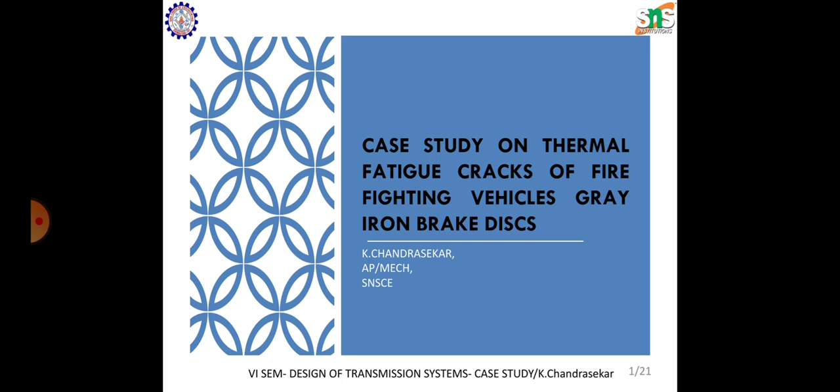Before entering into the case study, let me give an introduction. The braking system represents one of the most fundamental safety critical components in modern passenger cars. We all know that braking is important, and braking performance of a vehicle can significantly be affected by the temperature rise in the brake components.

If the temperature rises, the efficiency of the braking gets reduced. The frictional heat generated at the interface of the disc and the pads can cause a high temperature. That heat is produced by the friction between the disc and pad.

The temperature may exceed the critical value for a given material, which could bring undesirable effects such as brake fade, local scoring, thermoelastic instability, premature wear, brake fluid vaporization, bearing failure, thermal cracks and thermally excited vibration. These kinds of effects may occur when the temperature of a given material exceeds its critical value.

If the brake is made from grey cast iron, then that grey cast iron has certain properties. If the temperature exceeds the critical value for that grey cast iron, then effects like brake fade, local scoring, and thermoelastic instability may occur.

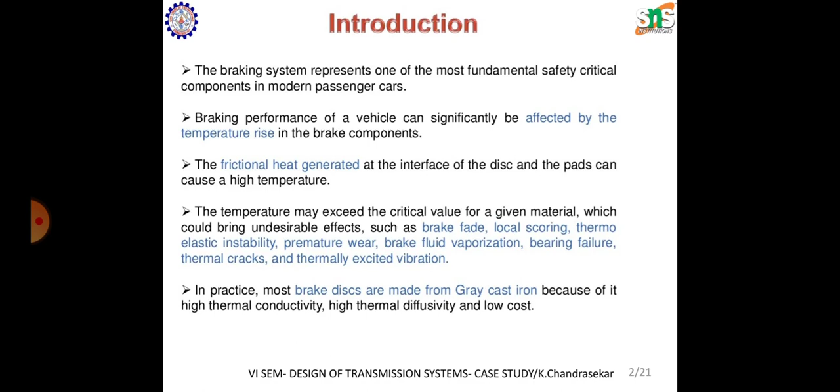The brake disc got failed and that is taken for the study, so we go for the analysis. What are the failure analysis?

Causes for thermal fatigue failure: from the company I got that the failure is due to thermal fatigue. The thermal fatigue may occur due to, first, high speed with heavy braking load; then elevated temperature gradient; then continued environmental exposure. These three are the major reasons for thermal fatigue.

In this study, the failure analysis of the brake disc used in a firefighting vehicle was carried out. Detailed studies including visual examination, optical microscopy, scanning electron microscopy, X-ray energy dispersive spectroscopy, chemical analysis, metallography and hardness measurements were included to find the final root cause of the failure.

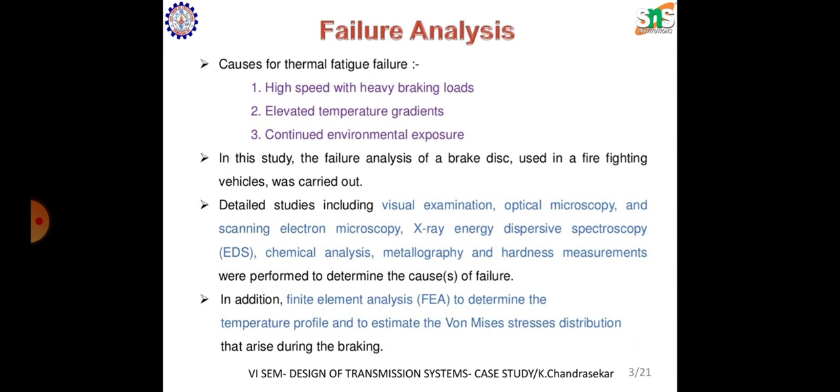In addition, finite element analysis to determine the temperature profile and to estimate von Mises stress distribution that arise during the braking was also done to find the temperature profile.

The brake disc characteristic is very important, that is, to find what are the critical values. The brake disc in this case was designed to withstand local scoring, thermoelastic instability, premature wear, brake fluid vaporization, bearing failure, and thermal cracks. So this brake disc did not fail due to these reasons. There may be one particular reason that we need to find.

The table shows the basic characteristics of the brake disc. Inner disc diameter is 66 mm, outer disc diameter is 262 mm, disc thickness is 23 mm, disc height is 51 mm, vehicle mass is 1385 kg, deceleration is 8 meter per second square, initial speed is 28 km per hour, and effective rotor radius is 100.5 mm.

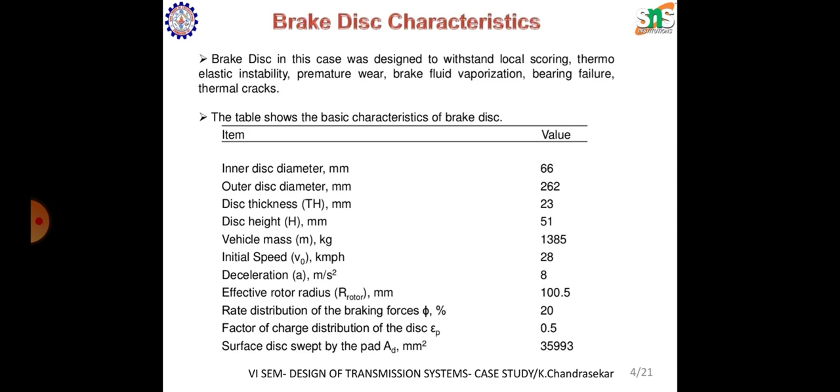The rate distribution of braking forces is 20%. The factor of charge distribution of the disc is 0.5. The surface of the disc swept by the pad is 35,993 mm square. These are the characteristics of that particular vehicle disc brake.

This figure shows the assembly or dismantled view of the disc brake. The shaft is attached with the bearing flange, then the flange is coupled to the brake bracket, and the brake bracket is attached with the disc pad and also the caliper.

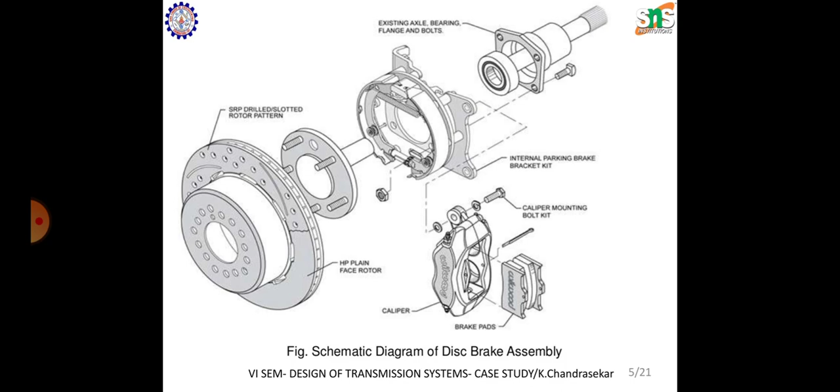So it is shown in the figure. So the disc, in the figure the leftmost one is the slotted disc. That slotted disc is the general assembly, but in most vehicles they don't use the slotted disc. Recently slotted discs are being used, but in the initial stage there was no slotted disc. So in this firefighting vehicle also they don't use a slotted disc.

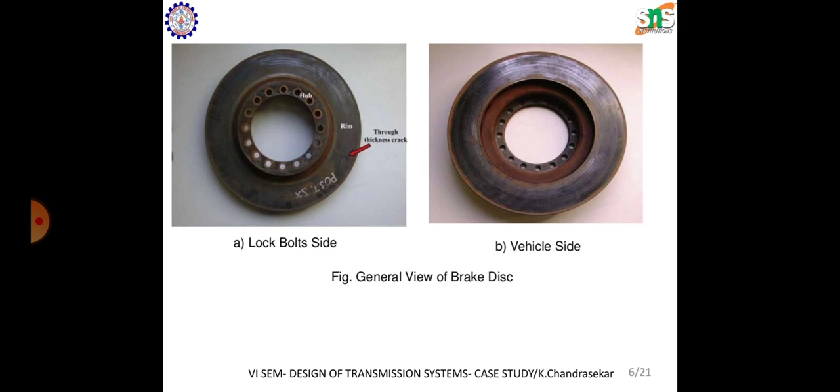So the disc used in that vehicle is shown here. Figure A shows the lock bolts side, and figure B shows the vehicle side. So one side is like a male part and the other side is like a female part. The arrow mark shows a through-thickness crack; in that area the crack is found.

So a clear view is shown here. This view is taken with macro fractography. In the picture we can clearly see the crack. The cracks propagate from and are seen to run radially from the interior to the exterior of the disc. Can you see that?

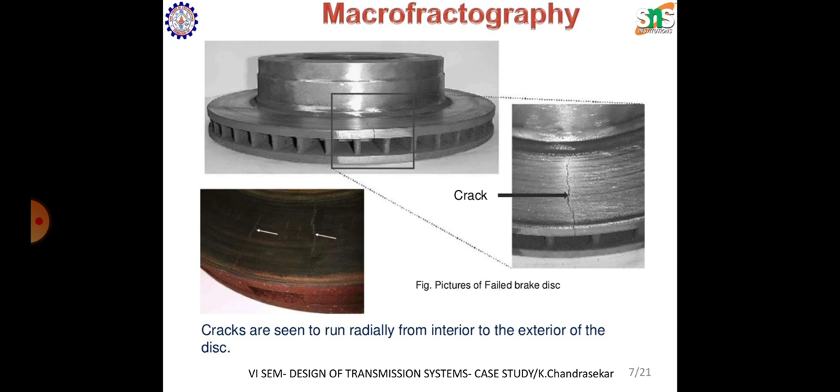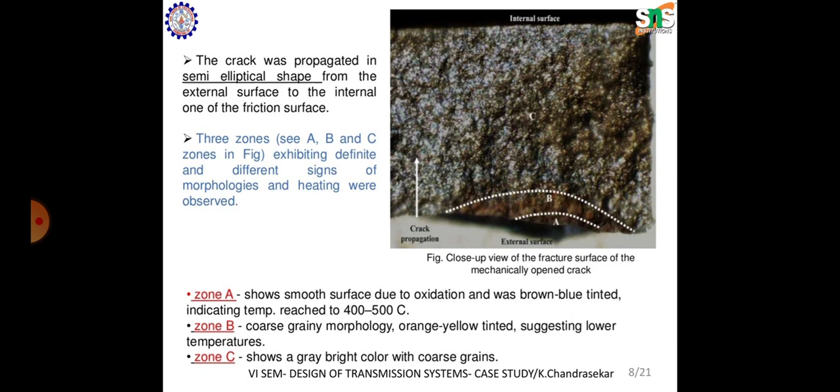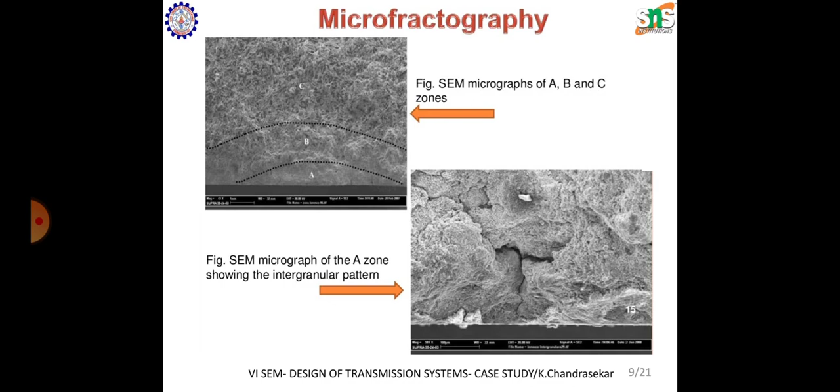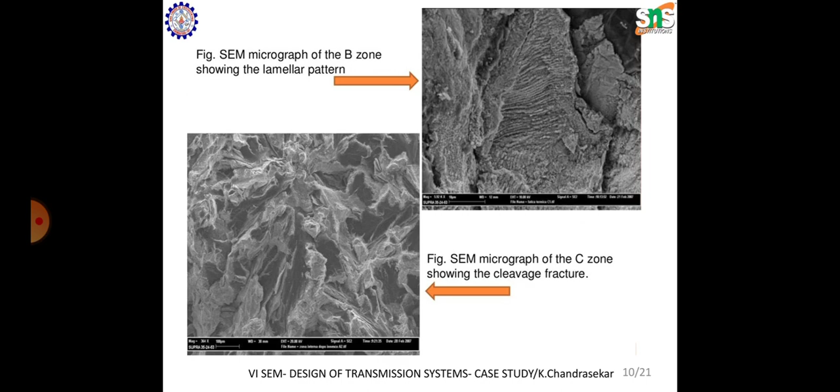Microfractography was also done. The results show that in zone A there is an intergranular pattern. From zone B the results show a lamellar pattern occurs, and zone C shows a cleavage fracture.

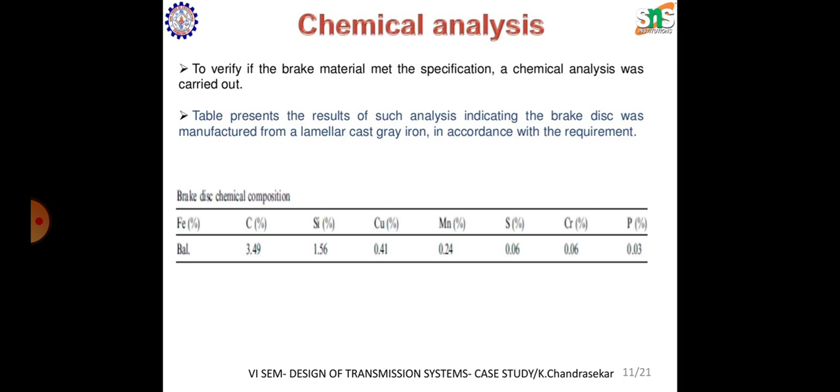Then chemical analysis was also done to verify if the brake material met the specification. A chemical analysis was carried out. The table below presents the results of such analysis, indicating the brake disc was manufactured from a lamellar cast grey iron in accordance with the requirement.

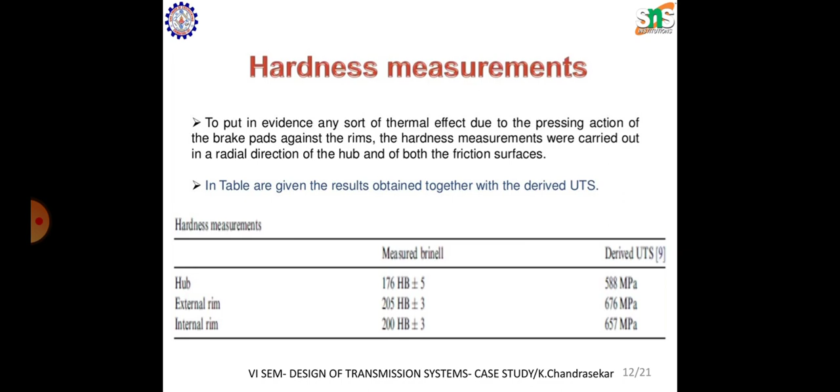Then hardness measurement was also done, to put in evidence any sort of thermal effect due to the pressing action of the brake pads against the rims. The hardness measurements were carried out in a radial direction of the hub and of both friction surfaces, and the results obtained together with the derived UTS are shown here. At the hub it shows 176 HB Brinell hardness number, the external rim is 205, and internal rim is 200 HB. The ultimate tensile strength of the hub is 588 megapascals, the external rim is 676 megapascals, and the internal rim is 657 megapascals.

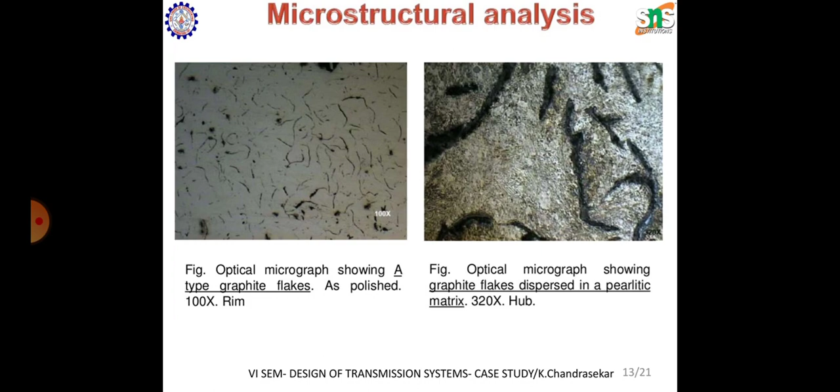Then microstructural analysis was done at the crack surface. In the figure, the first figure shows optical micrography showing A-type graphite flakes as polished at 100 times in the rim area, and in the hub area the optical micrograph shows graphite flakes dispersed in a pearlitic matrix. Then in the rim, optical micrography shows micro cracks surrounding graphite flakes. So cracks are found in the rim region near or surrounding the graphite flakes.

So the metallographic evidence is observed and shown in the table here. In the microstructure, the pearlite matrix at the hub is well oriented, while the external rim is randomly distributed. In the hub, A-type graphite flakes are 80 micrometers, and in the external rim it is 165 micrometers. Austenite traces are found in the hub, but no austenite is found in the external rim, and in both hub and rim there are no carbides.

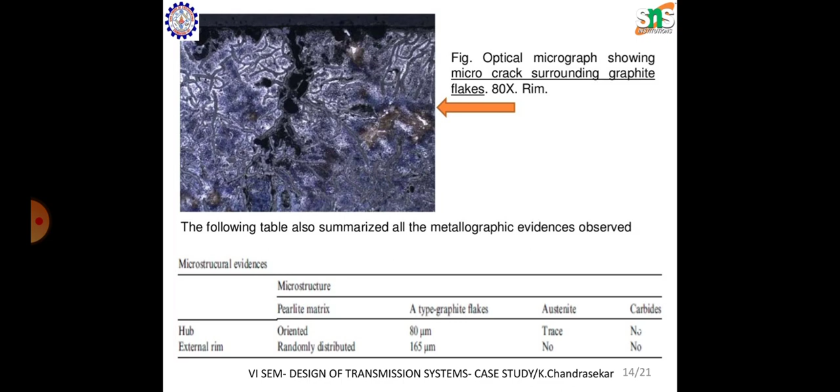Then finite element analysis is also done. The simulation was carried out as thermal analysis in transitory region to determine the temperature profile in the disk, and linear elastic mechanical analysis to estimate the von Mises stress distribution. So to find out the stress distribution and temperature profile, we go for the finite element analysis, which is carried out on that disk.

A gray cast iron type 25 was chosen as material in accordance with the hardness value. Dealing with the thermal analysis, an evaluation of the vehicle dynamics was used to find the heat flux equations.

The conditions taken are: brake speed of 70 km/h, brake duration of 1 second, hydraulic pressure exerted during braking action of 5 megapascal, and atmospheric temperature of 20 degrees Celsius. These are normally used in the analysis. In addition, an external forced convection of the areas out of the pads contact and internal ones for the air cooled holes were used. Using these conditions, the heat flux is approximately 7 watts per mm square.

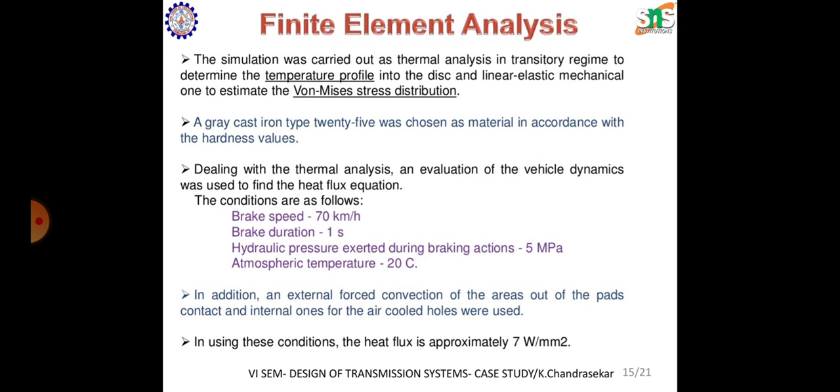So the thermal analysis, from the finite element analysis, the temperature profile for the external rim and hub is shown here. You can see that during the brake duration, that is between 1 second...

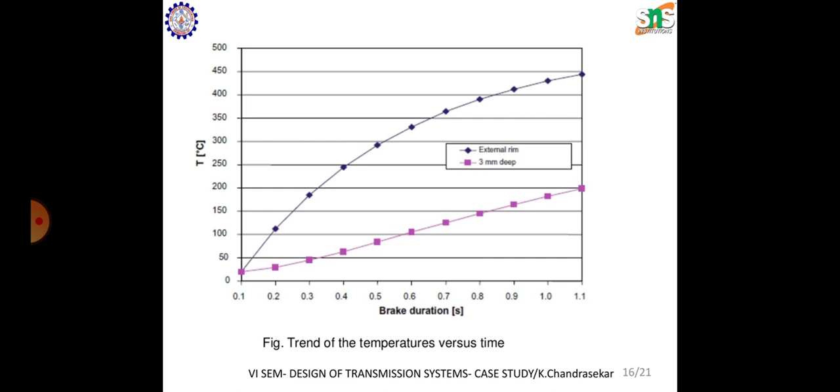The temperature is increased from 0 to approximately 450 in the external rim, and from the rim inner, that is from the external surface below the 3 mm depth, at 3 mm depth it shows that the temperature reduces. That is, it gradually reaches from 0 to 200 degrees Celsius in 1 second.

So the surface where the pads are getting joined with the disc, in that area the temperature is very high, and if we go further inner, then the temperature gets reduced. So the analysis view is shown here: the first picture represents temperature distribution, and the second picture represents von Mises stress distribution.

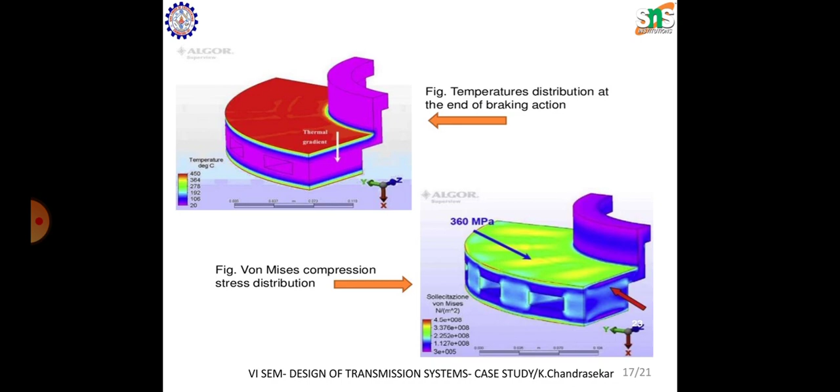So where the break appeared, the stress is 360 megapascal. So the stress is... from these results are as follows.

Analysis of the results: the morphological evidences together with the FEA are in agreement in identifying the area of crack development. In particular, the stress is localized in the radial direction on the friction surface. The intergranular pattern confirmed by metallographic examination and the lamellar pattern observed on the fracture surface also revealed that the cracks propagated by fatigue from the external friction surface to the internal ones.

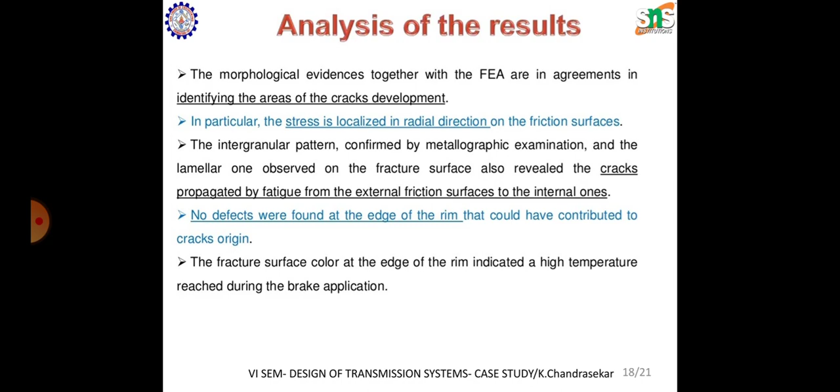No defects were found at the edge of the rim that could have contributed to the origin of the cracks. The fracture surface color at the edge of the rim indicates a high temperature was reached during brake application.

In conclusion, during braking, the exterior of the friction surface is subjected to periodic tensile and compressive circumferential stress, which leads to fatigue crack initiation and propagation.

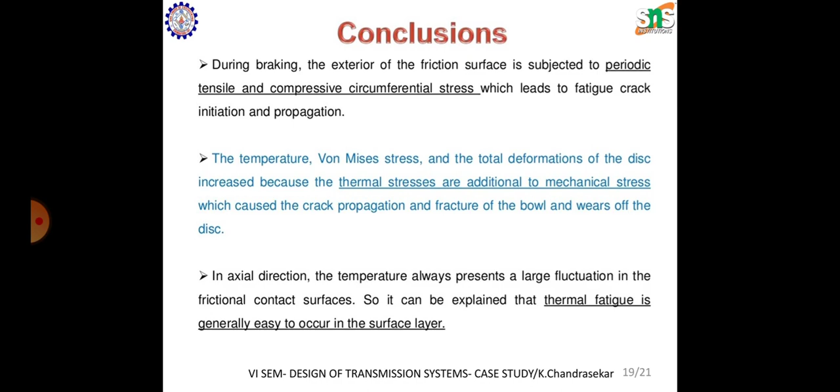The temperature, von Mises stress, and local total deformations of the disc increase because the thermal stresses are additional to the mechanical stress, which causes crack propagation and fracture of the bowl and wear of the disc. In the axial direction, the temperature always presents a large fluctuation at the frictional contact surfaces, which explains why thermal fatigue is generally easy to occur in the surface layer.

Then how to avoid that is by following these recommendations. There are 3 ways to eliminate thermal cracking in brake discs. One is to increase the yield and fatigue strength of the disc material. So when we change the disc material, we can avoid fatigue failure.

Then decreasing the braking temperature. Then redesigning the hub rotor unit to eliminate constraint stresses. Also, a brake mode with long distance and low pressure could release the residual stress caused by severe emergency braking, and would contribute to delaying the restraint of the initiation and propagation of thermal fatigue cracks to some extent.